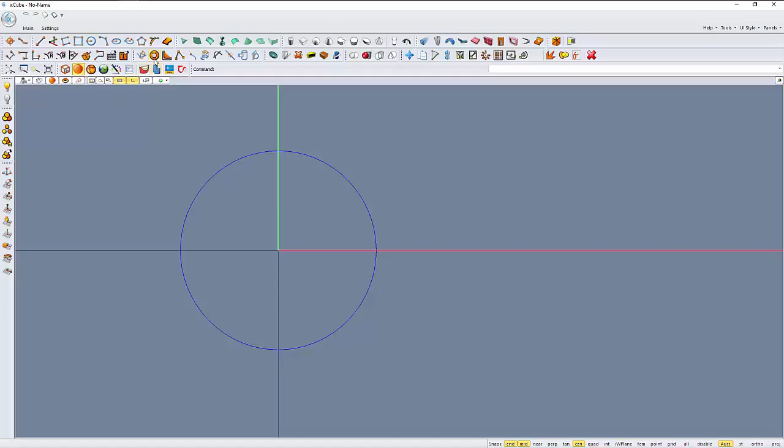I wanted an offset of 12 millimeters. That's 12, maybe a little bit more. Let's make it 30 millimeters. That's it, so I want these to be my teeth. We have the two circles.

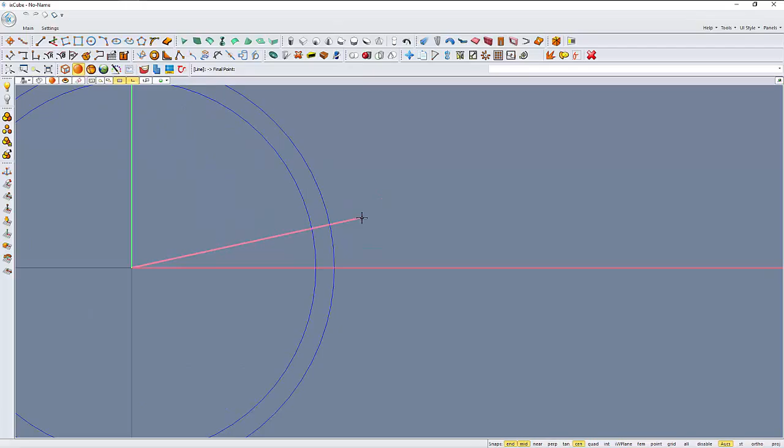We will now go and draw a line, center point, and I will use now the constraint over an angle, so minus the symbol, minus 18 degrees. So you see my line is constrained to 18 degrees.

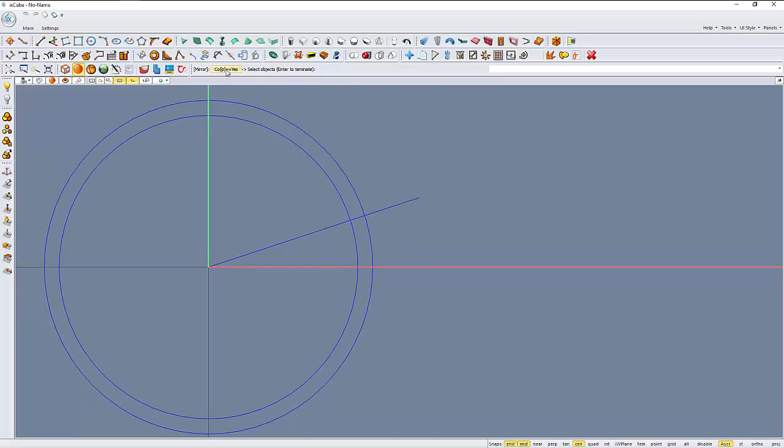Now I will recall the mirror tool. Do we want to copy? Yes, I want to mirror this line. The first point is the center point, and then I keep down the shift key, and my mouse goes onto the X axis, so I have a perfect mirror over this horizontal axis. So these two lines now are at 36 degrees.

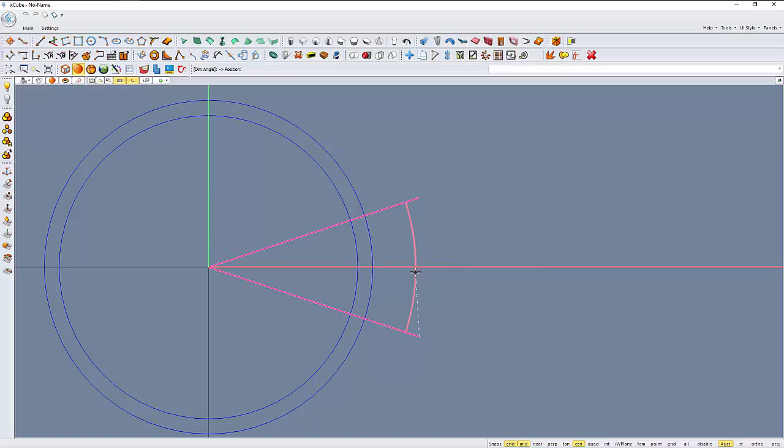To be sure, let's measure these. This one here, and that, and it's 36 degrees. Let's move away this dimension line.

Now I will draw again a line, center point, minus the minus symbol, 10 degrees. So I'm going at 10 degrees, and we will use again the mirror tool, this line from center point and here. So maybe it's a little bit small.

Let's offset a little bit more this one. I will offset again by 15 millimeters, like that. So I don't want this.

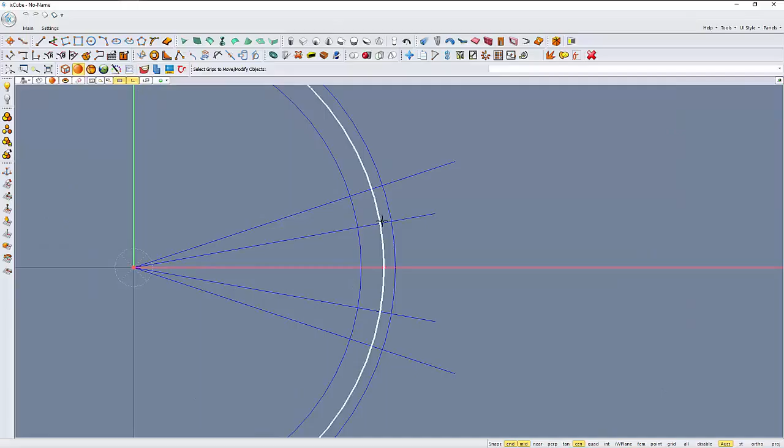Okay, we will use now the trim tool, and we have it here in the line tools. I will drag it out. This is the trim tool. Select curves, trimming curves, these two here, and we will trim this one and this one here, like that.

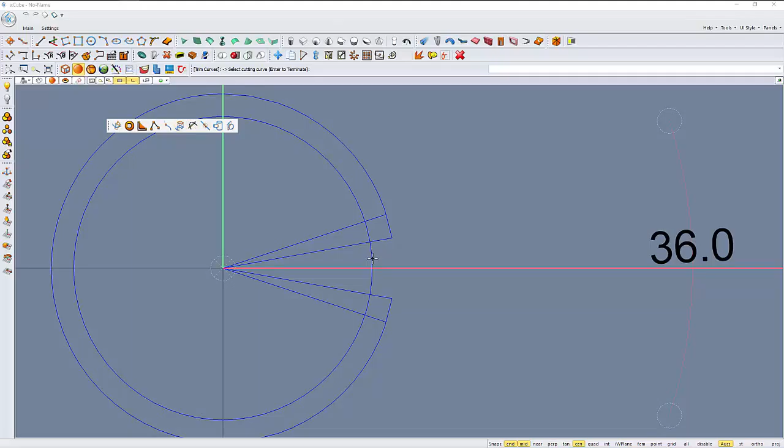I will recall the trim tool again, right click to recall the last command, and we will trim this one. Let's trim also these. So trim my cutting curve, and I will trim these curves here. So this is my two teeth, and I want the hole here.

Now we recall the fillet tool. The radius is 10 millimeters. That's okay. Wait a minute, I need to split this curve here, so let's recall first the trim tool again, and I want to trim this circle.

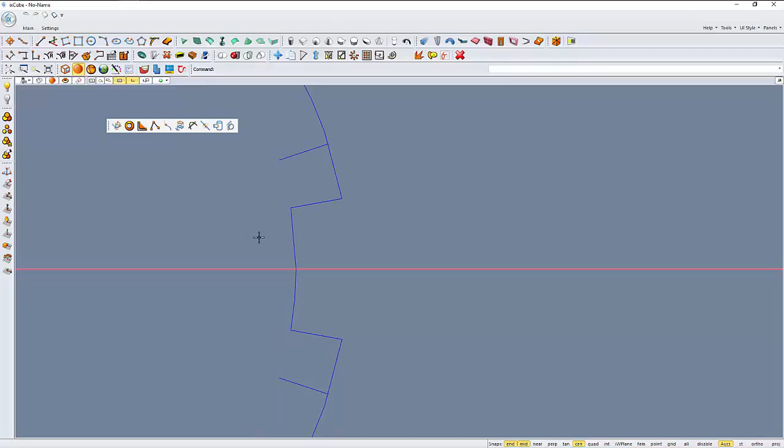So fillet 10 millimeters, first line, right click to confirm the first line, select the second curve, this one, and he does my fillet. Right click, I have recalled the fillet tool.

The first curve is this one. Right click to confirm, so now he's asking select the second curve, this one here, and we have done the fillet.

Let's repeat the fillet tool, right click to recall. The first curve is this one, the second curve is this one, and that's it. Again, and the last time, the first curve is this one, the second curve is this one.

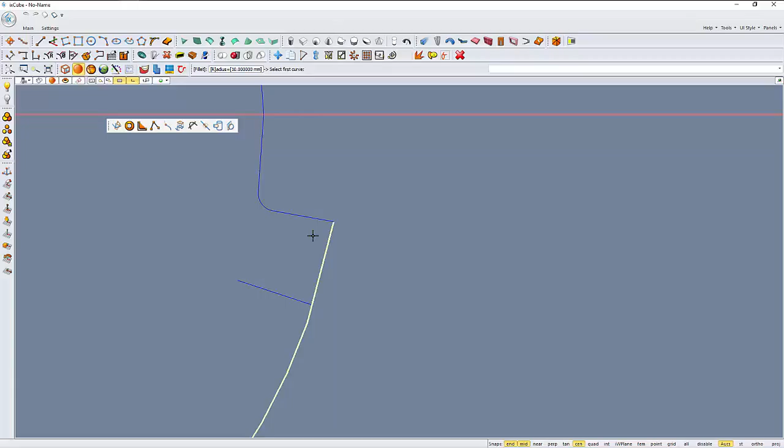The last thing that we need is a trim again. I need to trim this outer part of the circle.

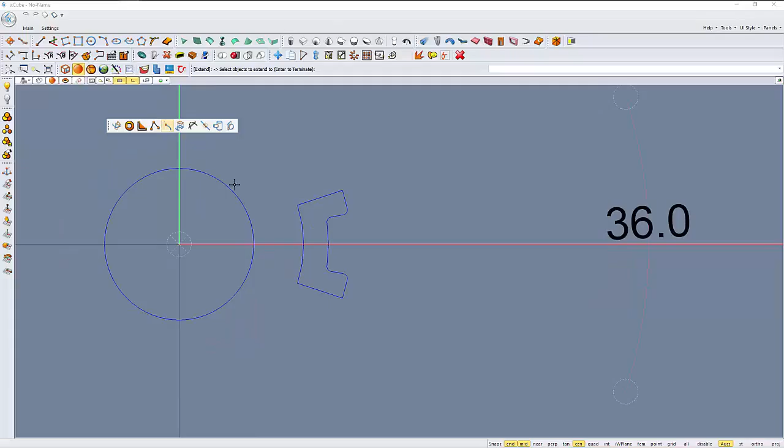Okay, so we have made these two teeth, so I will draw again a circle, maybe 150. Extend to this curve, extend to this line here and this line here, escape to delete the command, and now I will call the trim, the cutting curve, these two, and trim my curve.

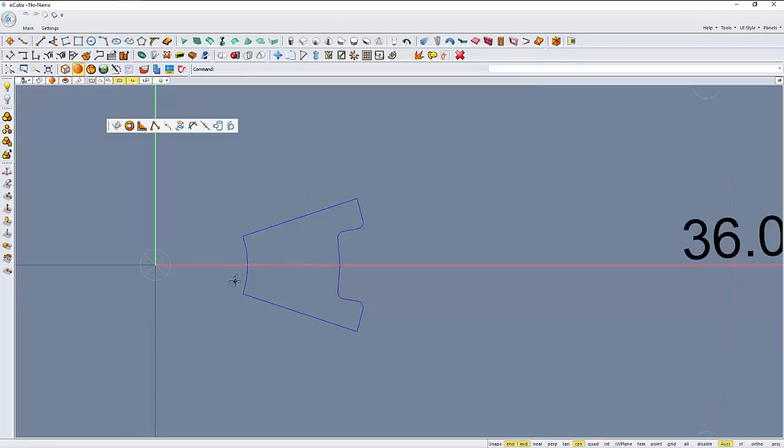Okay, that's better. Well, since now we're going to do a copy, an array, I don't need these two curves here, so I will delete them.

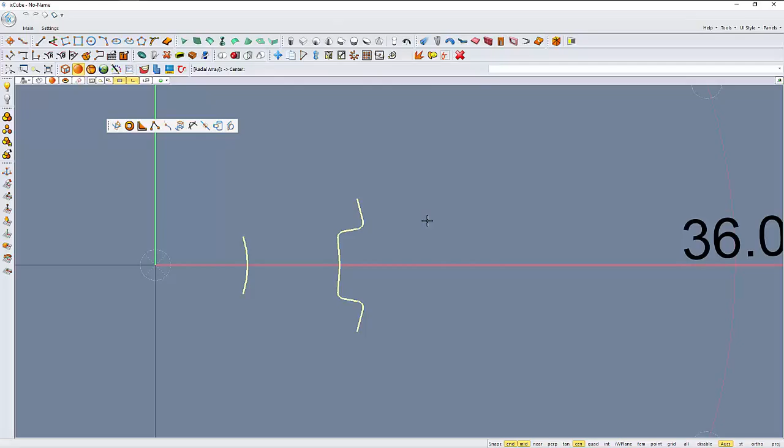We now will use the tool radial array. Select the objects, these. Complete angle, yes. Number of copies, 10. 10 is okay because I have 18 and 18. 36 degrees is this part here, and over 360 degrees makes 10 copies. The center point is the center of this one, and that's it.

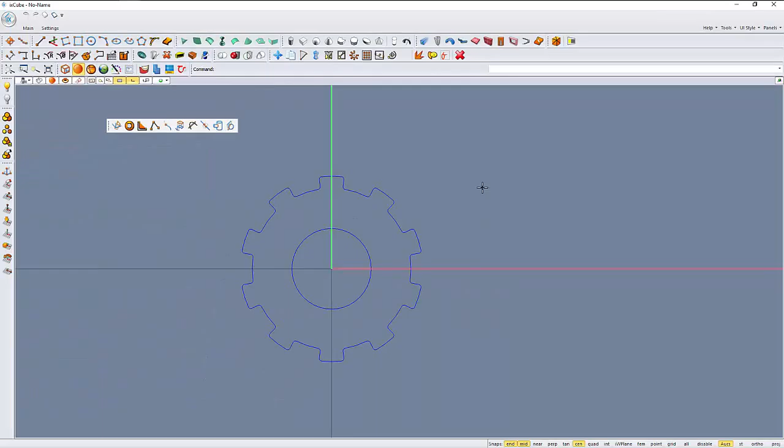We have made this gear. We will now go and use the tool join. These are all pieces of curves like that. So the join, this one here, join objects, we select all of them and we join them all together. So now it's a single object. So we have designed this flat gear on the ground.

We're now going to use this tool here, create a planar surface.

Planar surface asks for the curves. I will select this one, and that's it. So now it's a surface.

Clicking on the surface, the push-pull tool comes up, this gizmo we see here. This gizmo has a ball, a round dot on it, meaning that in any way we move this gizmo, we will add material. So I click on this one, drag it up, and digit 25 millimeters. Now it's constrained to 25 millimeters, so I click outside and I got it.

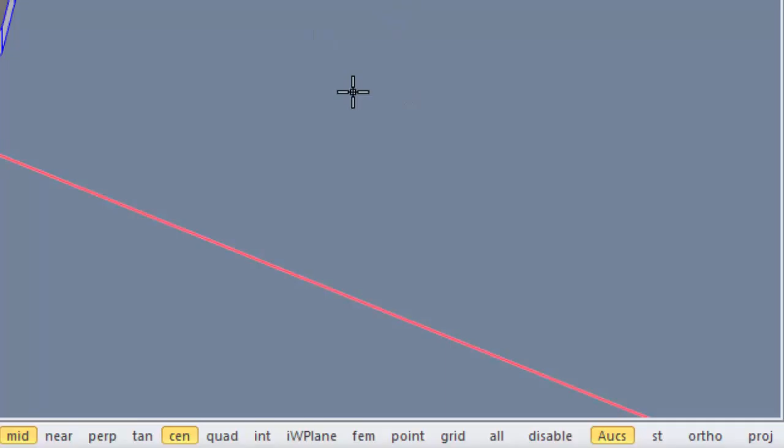My gear. What we want now is to increase the thickness a little bit to reinforce this gear. Be aware that we are using a special feature, active because near the snaps tools we have the auto UCS active. When this option is active, any drawing tool can be dropped directly on a surface.

Let's recall the draw circle tool, by center and radius. As soon as I move near faces, these become red, meaning we are going to drop the curve on that surface. So I recall draw circle, center and radius. This is the center point, and I just drop it over here.

So we have drawn this circle, but if we click now on a surface, we see that the surface has been split in two parts. When the option automatic UCS is active, we draw directly on the surface and merge the curves onto it, so it gets split.

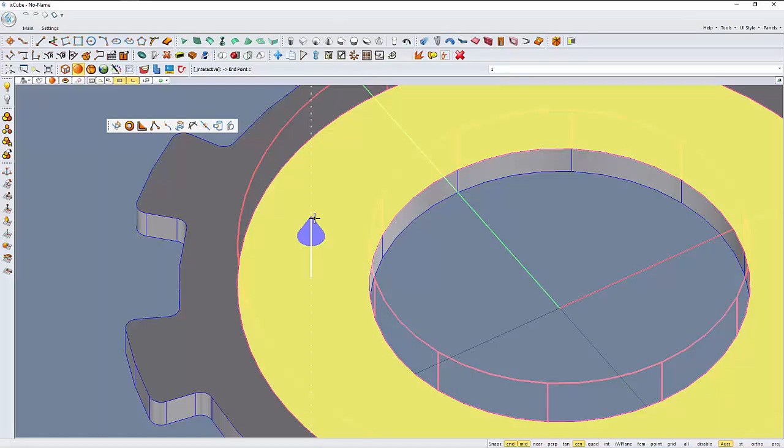Once we have done that, we click on this one, drag it up again, and add 12 millimeters on this side. I will do the same on the opposite side.

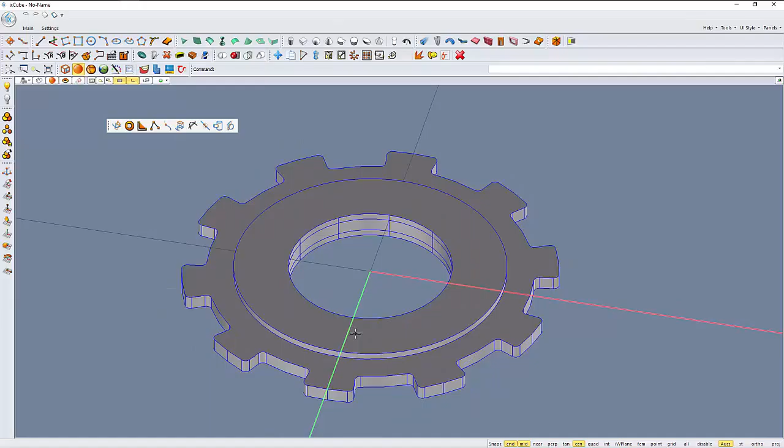Draw circle again, center and radius. You see that the red surface is active. We go onto the center point of this curve, and input 250 for the radius of the circle. I will extend this again by 12 millimeters, and that's it. We have added these two parts here.

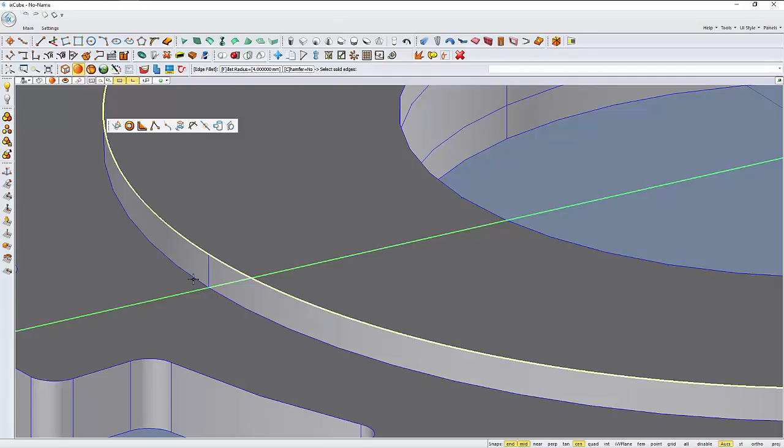Let's do the same on the other side. Repeat the command, 4 millimeter fillet, this one and that one, and we got the fillets here. Let's make another fillet, this time changing the radius to 10 millimeters, and do it on the other side. So we have done these two fillets.

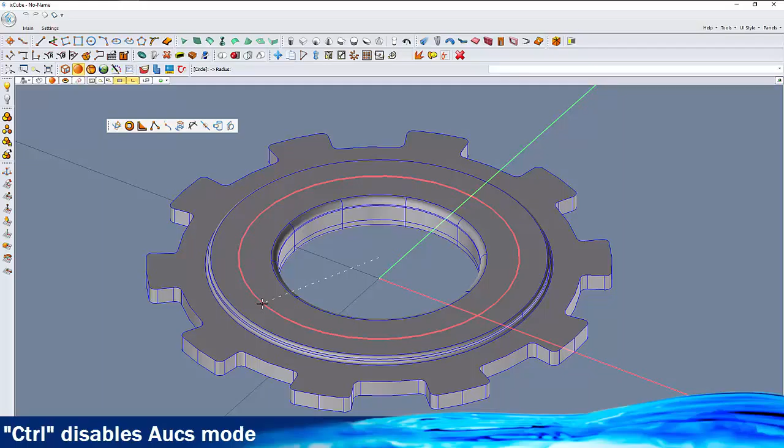Last thing we would like to do is make some holes, maybe inside on top of this one. I will use draw circle again, center of this one, holding the control key down, which means I do not want to merge this curve onto that surface. Now we see the shape and the curve.

I will now draw a circle, center and radius, using the near snap. Again keeping the control key down, so I have this small circle here.

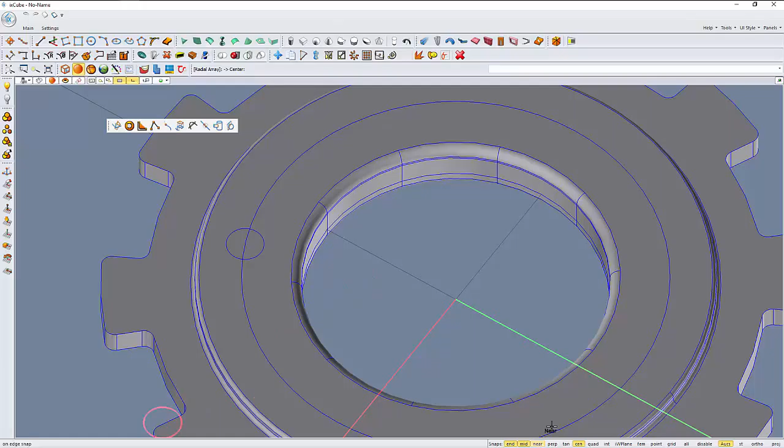We will now recall the radial array tool. Yes, the circle is my object. Turn 360 degrees, number of copies 10. Center of the radial array, and taking off this near snap and this one here. So we have made these 10 circles.

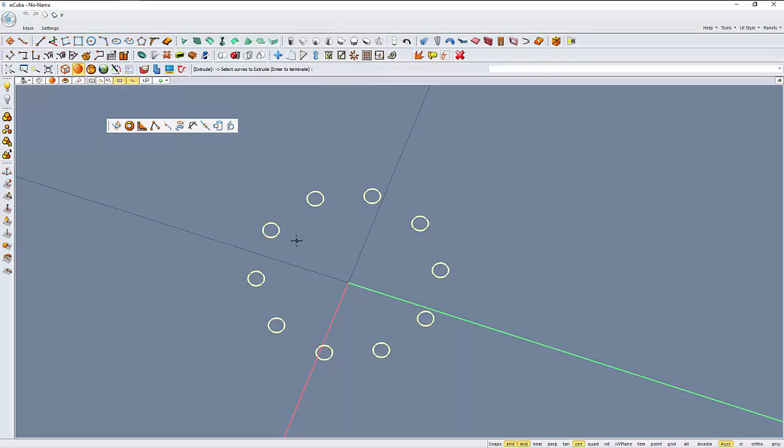We will select these circles now; it's easier if we hide this object, since we don't need this one. I would like to extrude these to make holes into the gear. So I recall the extrude planar curve tool, select the curves to extrude, the origin of the extrusion, this one, and up like that. So I have made these bars.

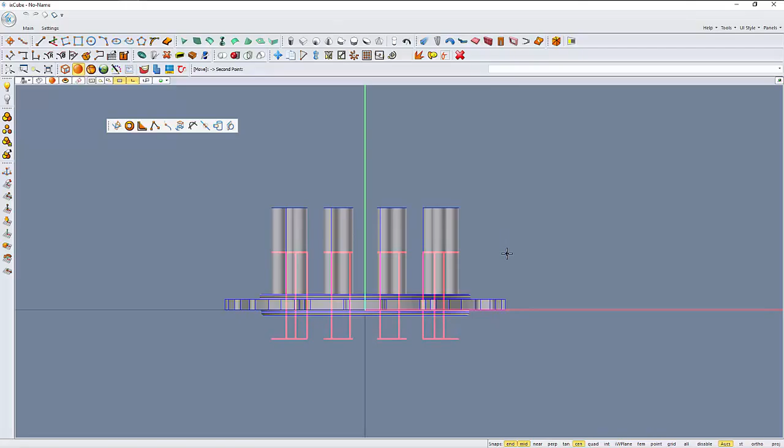I will put my view into a front view, and now use the move tool. I will select these and move them down. With the shift key I'm going down in ortho mode.

We are ready. We can go for the Boolean operation. So I will use Boolean difference, select the source object, this one. So we have made this gear.